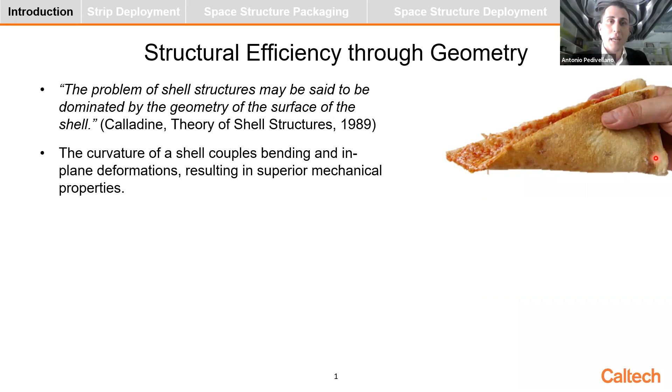Now, most of you have realized at some point that if you hold the pizza this way, by just bending the crust, your pizza slice becomes much stiffer and it remains straight. And this is really the key idea behind shell structures. We're talking about structures that achieve very good mechanical performance thanks to their smart geometry. And by smart geometry, I mean that they really use curvature. Here I'm showing several examples of such structures in engineering.

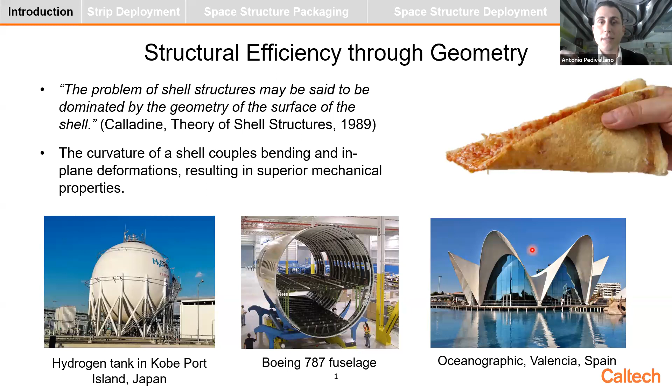On the left, there are spherical pressure tanks. There are also applications in aerospace for airplane fuselages and examples in architecture. So what's common to all of them is that they're using a curved geometry. And because of this, they can be very thin-walled, which makes for lightweight structures. And as you can expect, lightweight structures are essential in space. And in particular, thin shells are used as deployable booms up there.

These booms are essentially like beams, so they are extended in one direction. They have a curved cross-section, and they're very thin. Here we're talking about a few tens of microns. And because they are so thin, the cross-section can be flattened elastically so that you can fold them or you can roll them. And this allows them to be packaged in very small volumes to fit into a rocket and then deployed in space.

And once they're deployed, they recover their original cross-sectional geometry, and therefore they're capable of bearing excellent loads. Because of these characteristics, they're used often to deploy thin membranes. And here on the right, you can see an example of the rollout solar array, where you have this flexible blanket with photovoltaics on it, which is supported by two deployable booms along the edges.

And another example for square architectures is a solar sail that you see here at the top right, where you have a very thin membrane that is supported by 4 diagonal booms. Now, what's common to these two architectures is that in both cases, the membrane has no bending stiffness. And so in order to remain planar, you actually need to apply some tension to it. And this tension is applied by the deployable booms, which are therefore loaded in compression.

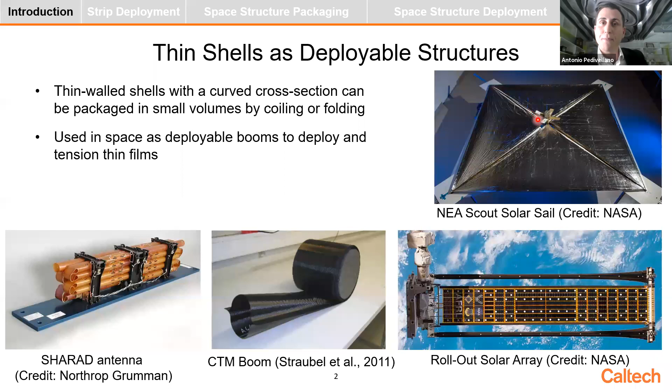Here at Caltech, we've been working on a different architecture, where you are using these thin shell components as bending stiff elements rather than compression elements. But let me just give you some more context about it. This is also part of the Space Solar Power project here at Caltech. The idea is fairly simple. We want to collect solar power in space, and we want to send it to Earth.

Now, this idea has been around for like 50 years, and yet today there is no system like this. The main reason is that the other concepts that have been proposed so far were just too heavy, too complex, and too expensive. And so the way we're approaching this problem here at Caltech is through modularity and lightweight structures. As you can see in this concept here, we envision a system of 3 kilometers by 3 kilometers in space. That's huge. And it's made of a constellation of 60 meter by 60 meter spacecraft like this one.

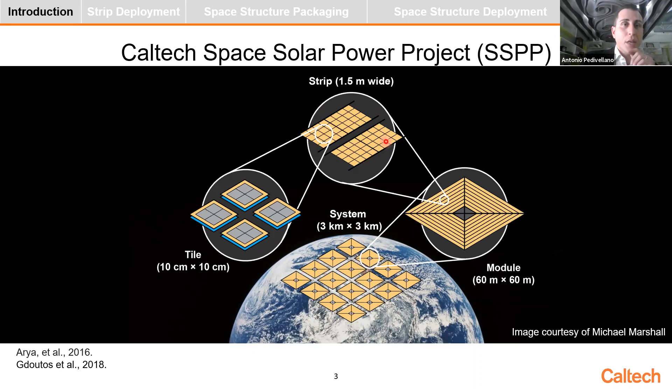The basic structural unit of this spacecraft is the strip, on which we have many tiles, which are our functional elements. And these tiles, which are flexible, combine both solar cells to collect solar power and antennas to radiate this power to Earth. Now, today, I'd like to focus on the structural aspects of this architecture. So let's take a closer look at this spacecraft. As you can see, it's square in geometry. It's made of four triangular quadrants.

And what's unique about this structure is that instead of having 4 diagonal booms running along the diagonals, we have distributed many thin shell components over the entire surface of the structure, and we have connected them in a space frame. And you can think of the space frame as a skeleton, a bending stiff skeleton that supports our flexible membranes. And as you can see here at the bottom, the basic structural unit that I mentioned before is the strip, which is composed of 2 longerons connected by several battens and with this membrane on top.

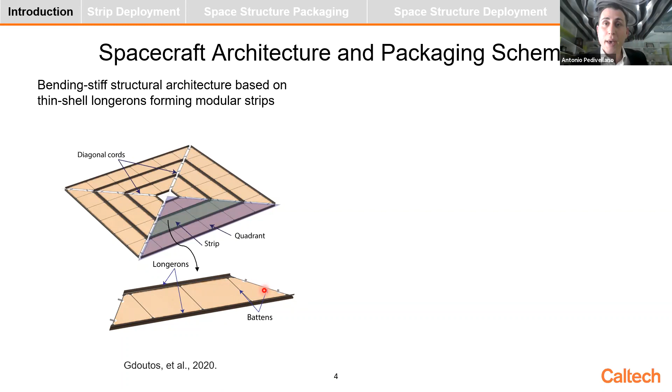Now, of course, you cannot fit a 60-meter spacecraft in a rocket, and so you need to package it. And the packaging scheme was proposed a couple of years ago, and it's inspired by Kirigami. It consists of a 2-step approach. You start from your deployed configuration in here. You first Z-fold each of the 4 quadrants to get into what we call a star shape, and then you wrap each of the 4 arms of the star shape to get into this cylindrical configuration. And to deploy the structure, you follow the same path, but in reverse order.

Now, what's interesting here is that when we are in the star shape and we want to reach the deployed configuration, we can do a strain energy deployment, which means if we just let the structure go, the structure is capable of reaching this configuration by releasing the strain energy. However, this process needs to be understood.

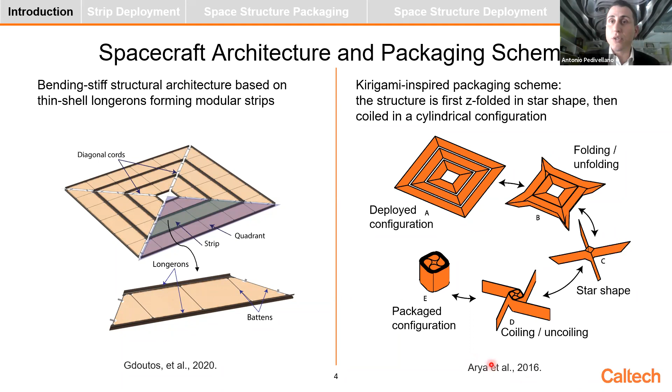And as you can see here, well, this concept was formalized in 2016, but the research on this problem started earlier than that. And ever since, we started a lot of research trying to make this concept real. So really behind what I'm going to show you today, there is the work of many people over many years. And it all started with the packaging concept that you can see here, and it was demonstrated just on membranes. Then we started studying individual components of our system, the longerons first, then the strips, and there were concepts of deployment mechanism to control this packaging process. And it was only in 2019 that we actually built our first 2-meter scale prototype.

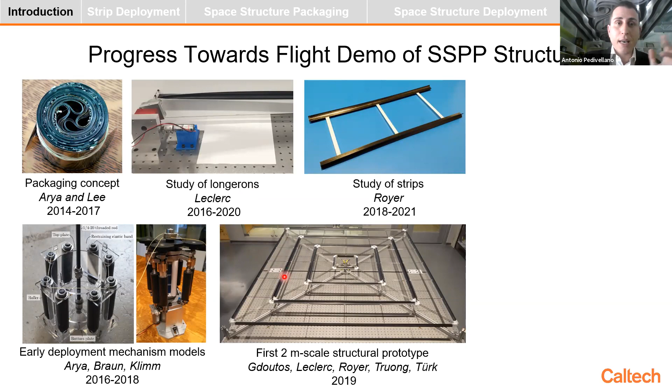And that was about the time when I joined this lab and I started working on this type of problems. And if you fast forward to today, here we are. We are developing our flight demonstration of this deployable structure and its deployment mechanism. And really my research bridges this initial structure that we built and we had no idea of how to package.

And there's actually a flight demonstration that we call DOLCE, which stands for Deployment on Orbit of Ultralight Composite Experiment. And we have been working on this for a couple of years, and it's set to launch next year. So that's pretty exciting. So today you will hear the steps that have taken this structure from here to that. And the way we are doing that is through a combination of experiments and simulations.

From an experimental standpoint, well, ground testing is what is done for most space systems. However, when you have these very large area structures, you run into a lot of trouble. One of the main reasons is that these structures are extremely lightweight and they're designed for space. So they're not designed for being operated in terrestrial application under gravity. And therefore, many of them cannot even withstand their own weight. And so you need some sort of gravity compensation in order to support your structure during deployment.

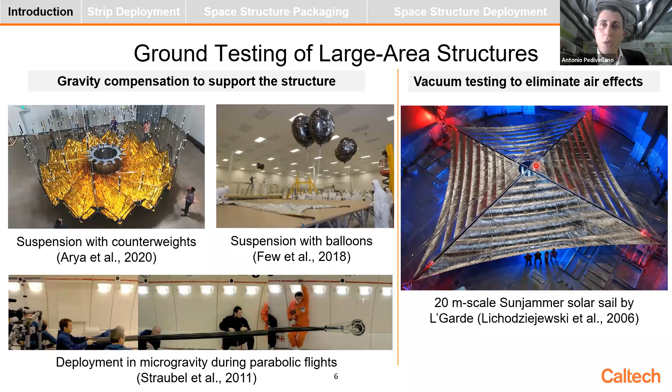And so the bottom line here is that during ground testing, you will never capture the actual behavior that you're going to see in space. And the only way to do that is through numerical simulations. And in the past, people have done simulations of large structures, especially in the context of solar sails. Here, for example, you see a simulation done for the IKAROS solar sail.

And those models were simplified. So initially, they were using the particle method. Then they developed their own finite element code. And these models were very good at capturing the global behavior of the structure, but they were still missing the local effects. For example, the contacts between membranes.

And really, in our case, we are dealing with shell structures. And the behavior of shells is all about local effects. For example, contacts are very important. And when you fold one shell, you start having localized deformations. So if we really want to predict the behavior of our structure in space, we will need high fidelity models of the entire structure, which is something that no one has done before.

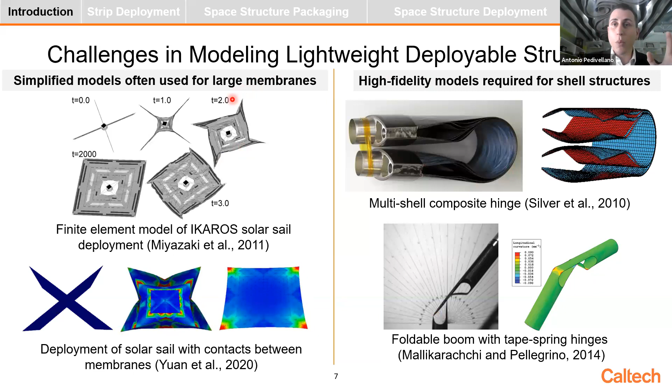And this really brings me to the objective of my research, which is to enable thin shell architectures for large area deployable structures. And just to be more specific, we want to do this in 3 steps. First, we want to observe this behavior experimentally. And in particular, we are asking what happens when you have multiple of these thin shell components folded together and you deploy them simultaneously by releasing their strain energy.

But in order to do these experiments, you need actually to package your structure first. And so we need to design solutions to implement the packaging scheme on these structures. And finally, we want to develop numerical models that are capable of capturing the complex behavior of the structure even during ground testing. And these models can then be used to support the design of new structures, as well as to verify their performance in space before launch.

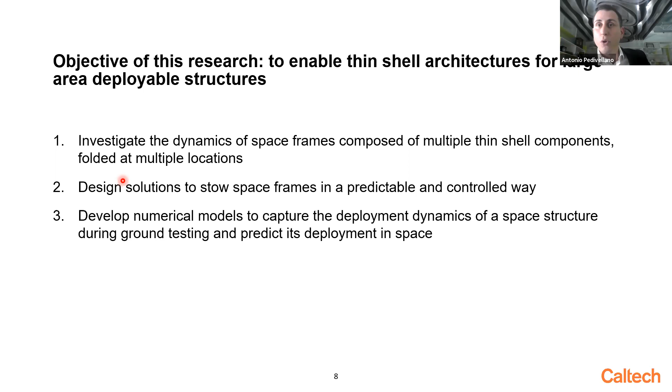The way we are approaching this problem is in 3 steps. First, we're going to look into a thin shell strip, like the one that you see here. So this strip is initially folded, and then we deploy it under strain energy. Then we will move into the space solar power spacecraft, and we will talk about the implementation of the packaging scheme on the spacecraft. And finally, we're going to look into the deployment dynamics of the spacecraft.

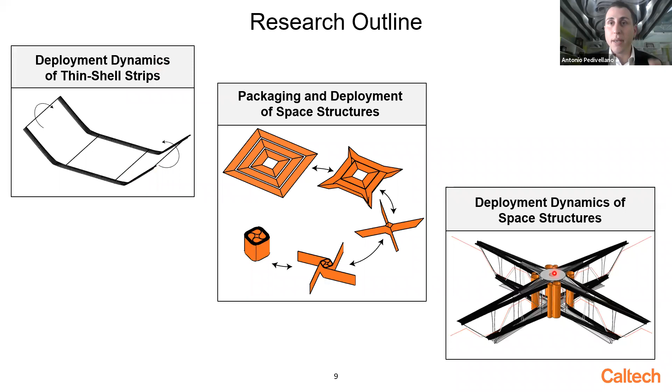But starting from the first topic, here you can see on top right, one of our 1.7 meter scale prototypes that is folded in a star folded configuration. And when we started looking at this problem, we said, well, let's try to model this entire problem at once. Let's build our finite element model. And I started doing that around my candidacy. So it was a couple of years ago. I already had my first model.

But then after a while, we realized that having a model is easy, but having the right model, that's very complicated. One of the problems was that we have many strips stacked together. There are many interfaces, there are many joints, there are many parameters in this problem, and it's very hard to isolate each one of them on this sort of structure.

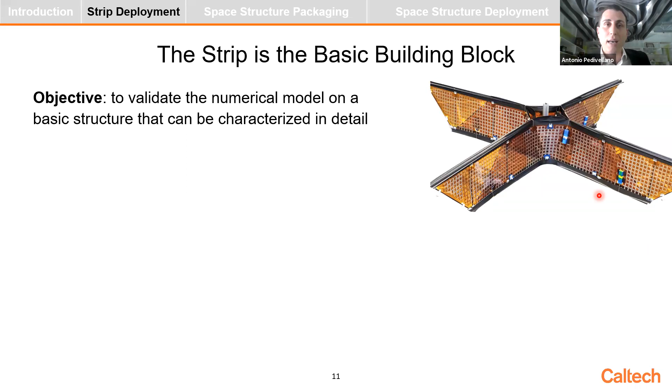And that's why after a while of attempts and lots of efforts, we decided to take a step back and look at a simpler version of the structure. We wanted something that could capture most of the challenges without actually bringing all this complexity. And this is the strip. As we said, our structure is modular, it's made of several strips. And so we just took a single strip from our structure. We simplified the geometry. We made it rectangular rather than trapezoidal. And we placed 2 elastic folds on it to mimic what happens in the real structure.

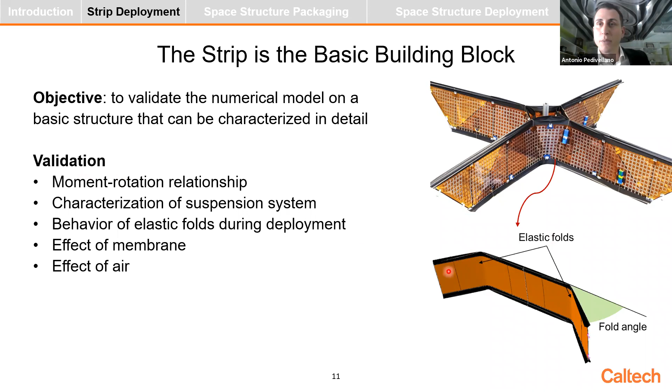And on this strip, we built several versions of it, and we did a lot of experiments to validate all of its behavior, not only the intrinsic behavior of the strip, but also the effect of the membrane on it, the effect of air, and the effect of the suspension system. And we built our finite element model onto the strip. So let me just give you some more details about this deployment study.

So here you can see at the top our strip. It's about 1 meter long, and it's made of two longerons that you see here. They have a TRAC cross-section, which is made of two circular arc flanges connected on a flat web. The longerons are connected by several transverse battens, and there is a membrane on top.

So this is just a dummy membrane. It's just to take into account the effect of a real functional layer. But this membrane has no functionality yet. So we built two models of this strip, one with the membrane on top and the other one without, just to understand what the effect would have been.

And we built a suspension system for this experiment, where we have cords running over pulleys and connected to counterweights. Now, in this case, we are deploying our structure against gravity. So this is not a gravity compensation system. Really, in this case, we are accepting the effect of gravity, and we built a suspension system that is easy to characterize in a very deterministic way.

And the initial conditions for this problem are set by two parameters, essentially. One is the distance between these two elastic folds, and the second one is the angle of the elastic folds. In particular, this angle is controlled by two other parameters, this initial height h0 and the mass of the counterweights m. So we started doing over 100 experiments, testing all different combinations of these three parameters to understand what their effect was on the deployment of the structure.

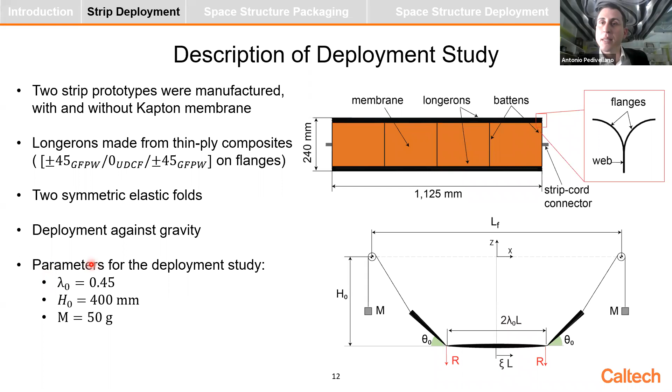And well, we found that in most cases, the behavior of the structure was consistent. So qualitatively it was the same. And so what we picked for the study was a set of parameters that is representative of a wide range of conditions.

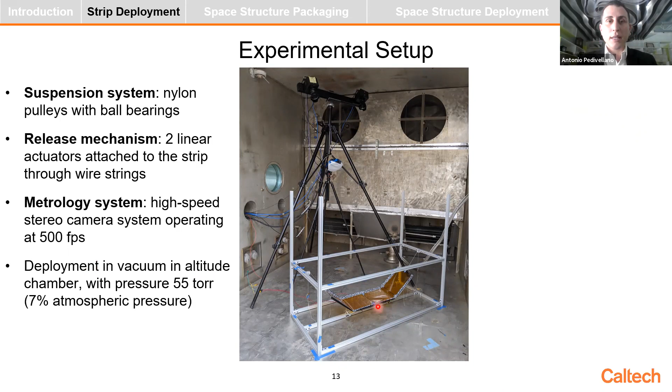So we built our experiment, and you can see it in here. We have the structure with the membrane in here, inside an aluminum frame that contains it. And on the aluminum frame, we have pulleys, miniature pulleys to have very low friction and inertia. We have a release mechanism that is composed of two linear actuators. So this release mechanism essentially holds the structure in its folded configuration, and then we actuate it, and it releases the structure in a very synchronized way.

And then we have a metrology system with two high-speed cameras that you see here. And with these cameras, we take 500 images per second, and we use them to actually get quantitative measurements out of these experiments. And as I mentioned before, we were interested in understanding what the effect of air was. And so we did our experiments in an altitude chamber, of which you can see the inside in this picture.

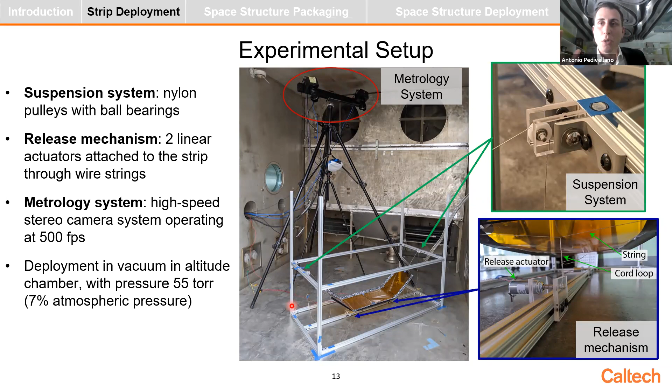And we operated this chamber at about 7% of atmospheric pressure. So this is not properly vacuum, of course, but for the purpose of our experiment, we found that at this pressure, the effect of air became negligible for our structure. So that's what I'm going to call vacuum from now on. And once we have the pictures from our experiment, we implemented an algorithm to reconstruct the shape of our structure from there. And the way the algorithm works is that we start from our images.

And as you can see in here, there are many white dots on our longerons. That's a speckle pattern that we painted on it. And we use digital image correlation to convert the speckle pattern into a point cloud. So we know the coordinates, the 3D coordinates, of many points on the structure.

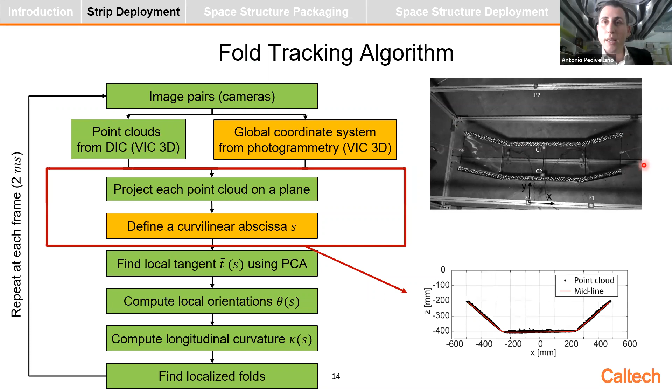And then we take each longeron, we project its point cloud on a plane. We find the midline for this point cloud. And we compute the local tangent to each one of the points, and then its orientation from the x-axis. So we get the plot that we have here.

So now here it's interesting to notice that we have basically three areas of uniform orientation. So at the center, the strip remains horizontal. And then at the two ends, we have equal and opposite angles. And essentially, the strip behaves like three panels connected together by hinges that gradually open.

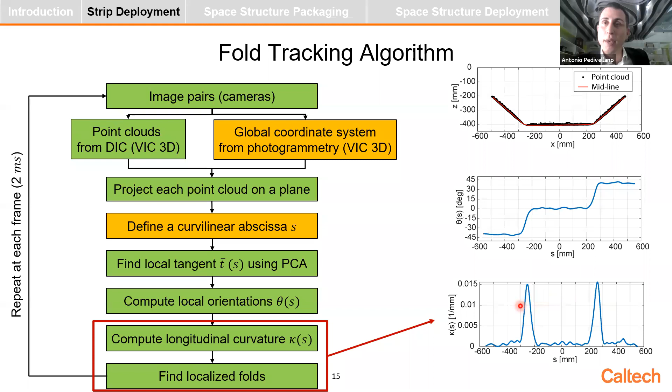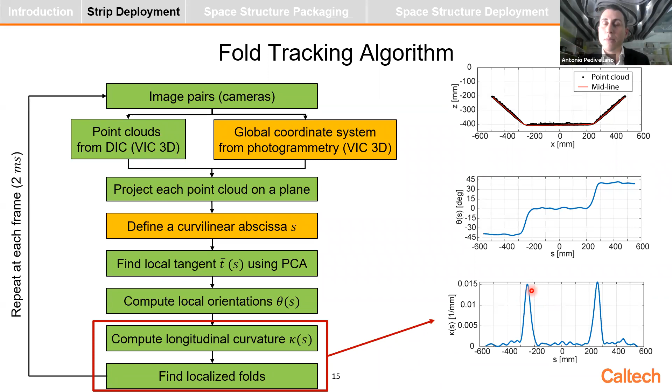Now, if you take the numerical derivative of this plot, you get the distribution of longitudinal curvature on the longeron. And again, here you can see that there are two peaks, very sharp. They correspond to the location of the elastic folds. And this suggests that for this problem, essentially the structure behaves as a collection of rigid parts connected by elastic hinges. And we're going to use this observation later in this talk.

So these plots are for a single snapshot from our experiment. Now we can repeat it for the entire duration of the deployment. And what we can get, for example, is the angle of the elastic folds that you see in this plot here. So there are two lines corresponding to the two longerons. So let's just look at one of them.

And what you can see there is that we are plotting the angle, the orientation of the two ends of the structure. And that's why you get two lines for each longeron. And you can see that it's pretty symmetric during the deployment. So this angle starts from about 45 degrees for this case, and it decreases to 0.

And when all the four folds on the strip became 0 for the first time, we defined our time of deployment, which for this case is slightly more than 300 milliseconds. Also, after this point, you can see that the angle remains 0. So basically what happens is that the elastic folds latch, the longeron becomes straight, and it doesn't buckle again.

Now, if you look at the elastic folds here at the bottom, and we track the location of these peaks over time, you see that the elastic folds remain stationary during this problem. And this is not an obvious result, because we know that there are many other problems in which instead you have significant propagation of the elastic folds. So it's interesting to see that in this case, this doesn't happen.

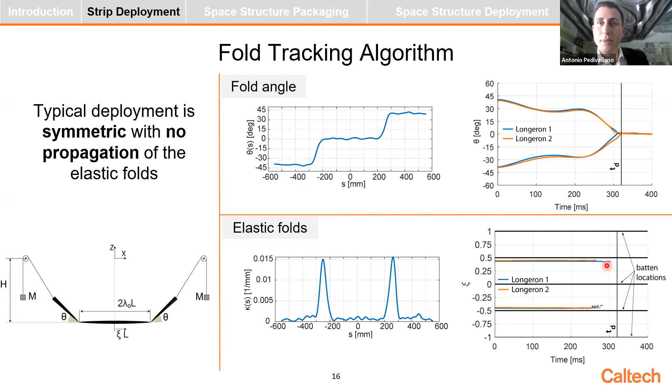And now that we have our algorithm in place, we can finally look at the experimental results. So first, I'm going to show you the results for the strip without membrane. And I'm plotting here the angle of the elastic folds. So here in blue, we have the deployment experiments in air, and in orange, we have the ones in vacuum. And you can see that in this case, there is basically no effect from air. The behavior is pretty much the same.

However, if you look at the strip with membrane, now you have a significant difference. And in particular, the deployment in air takes about 70% longer than in vacuum. And this means that for that type of structures, you cannot neglect the effect of air.

And another thing that I'd like to notice is that if you compare now the orange lines between the two plots, that's the behavior in vacuum, they're qualitatively the same. So this means that essentially the effect of the membrane is simply to add more inertia to the structure, but they don't contribute to changing the response of the strip.

And this makes sense intuitively, because our strip is basically loaded in bending. And we know that membranes have almost no bending stiffness. They only react to in-plane shear. And therefore, for this specific case, they have no effect on the deployment.

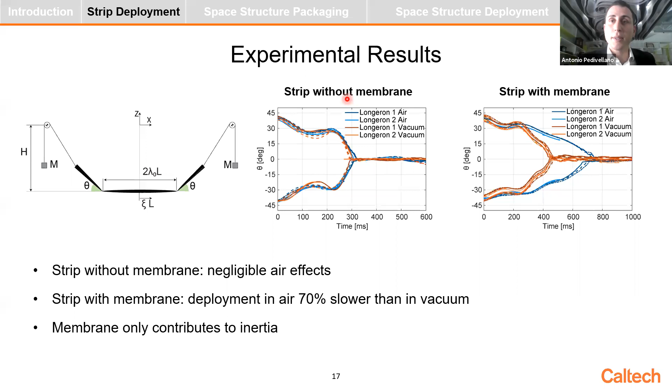Well, now let's see if we can capture all of these effects in simulations. And this is the finite element model that we developed in Abaqus. We are using an explicit dynamics solver. And since we saw from experiments that the behavior of the structure is mostly symmetric, we are only modeling half the strip. So here you can see the symmetry plane. A few words about this model. We are modeling the longerons as shell elements, the battens as beam elements.

We have 1D connector elements for the suspension system. And for the membrane, we're using membrane elements with a special material formulation that also accounts for wrinkling. And that's called the IPM model. It's been proposed many years ago, but we're using an implementation that was published by Deng and Pellegrino in a

paper from 2012. And for this type of simulation, the computational time is in the order of a day for the structure without membrane, and about 3.5 days for the structure with membrane. So they're quite intensive.

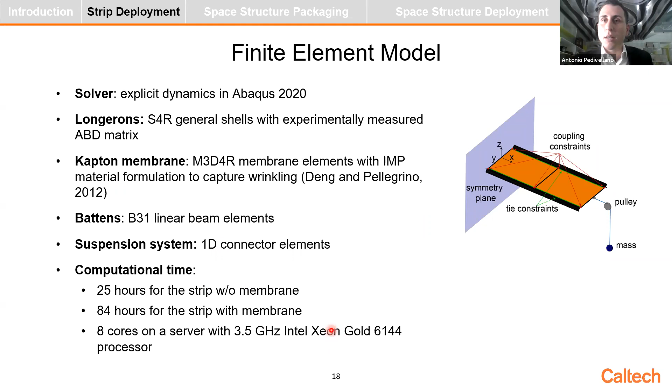Another thing that I'd like to mention is the effect of air. As we said, air is important for these problems. And if you really want to resolve this interaction, you need coupled structural and CFD solvers. That's what some people do. However, those are very computationally expensive, and we really wanted some simple way of dealing with this problem.

And so we are taking inspiration from some research that has been done on the vibration of membranes in air. Those studies identified two main contributions from this interaction. One is an increased inertia to the structure, because as you move your structure through a fluid, you are moving some masses of air with it. And so that results in added mass. And the second effect is air damping, because you are basically losing some energy in this interaction with the flow.

worked fairly well. And here, the idea behind choosing this half cylindrical volume is that we expect the effects of air to be basically zero at the edges and to increase as you move away from the edges. And that's why we ended up with this cylinder.

Regarding the air damping, if you look at our problem from an aerodynamic standpoint, it's very similar to the problem of a flat lamina with an incident flow perpendicular to the lamina. And in that case, in aerodynamics, people use a drag formulation where the drag increases with the square of the relative velocity. And the proportionality factor is a drag coefficient, for which there are many examples in literature for many

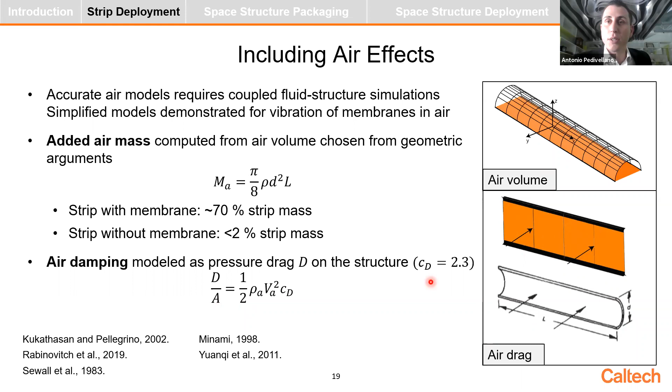And now let me just spend a few words on the way we approach this problem. And this is a pretty general way of dealing with this type of deployment problems. You always start from your initial undeformed configuration. First, you fold your structure.

And here you can see that the main contribution to the strain energy really comes from just flattening the cross section in the very first step when we create the folds. Then we have an increase of the strain energy as we fold our structure because we are increasing the angle of the elastic folds. And after an equilibrium step in which we achieve equilibrium, we start deploying our structure.

You see that the strain energy decreases as the structure becomes flatter and flatter. And at some point, there is a sharp decrease. And this is when we have snapping of the elastic folds. So here, basically, the elastic folds disappear, and the remaining strain energy is associated with the elastic vibrations of the structure. And we dissipate these vibrations in the final equilibrium step.

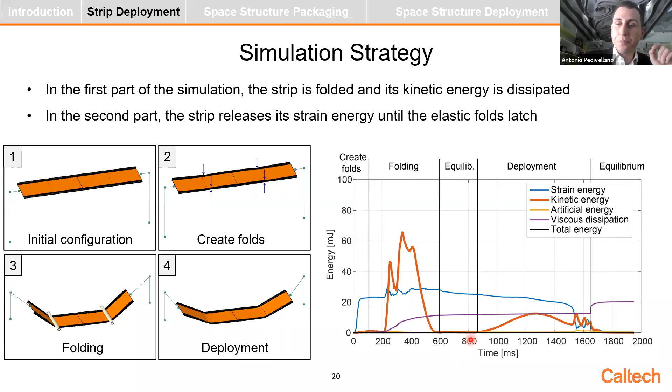And now let's look at the comparison with the experiments. Here we are showing different cases, so just don't focus on any one of them in particular. But what I like to show you is that we tried different combinations, the structure with and without membrane, in vacuum and in air. And we also tried different masses in the suspension system.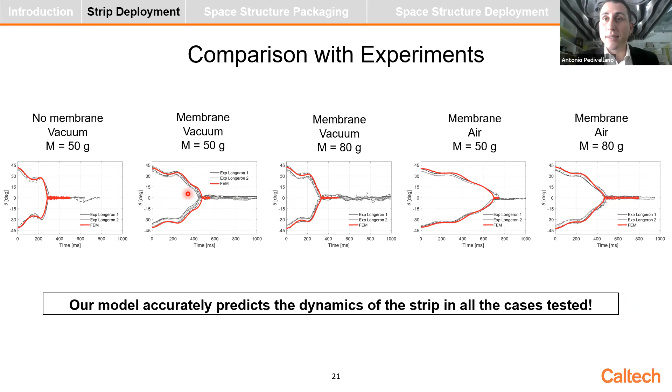And for all of those cases, we found an excellent agreement between the experiments in gray and the simulations in red. So that makes us confident that actually this model works and is predictive of the behavior of this type of structures. Well, now that we have this, we can try to move towards our solar power spacecraft. But if you want to do experiments on this, you first need to package it. So that's the problem that we're going to discuss now.

And here we have the first fundamental question to ask. Well, how can we stow our structure in a robust and repeatable way without breaking anything? And this is not a trivial question, because the first time that we built one of our deployable structures at the 2-meter scale, and we tried to actually fold it to do this process, starting from the deployed configuration into the star shape, well, we found this process incredibly hard.

As we were trying to fold our longerons, there were buckles appearing at random locations. So it was a pretty messy process, and we ended up actually breaking some of the components on it. So that told us that actually we needed a systematic way of folding our structure, and that's one of the things that I'm going to discuss today.

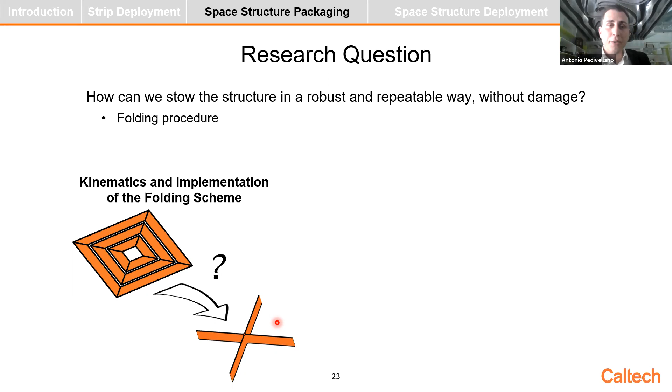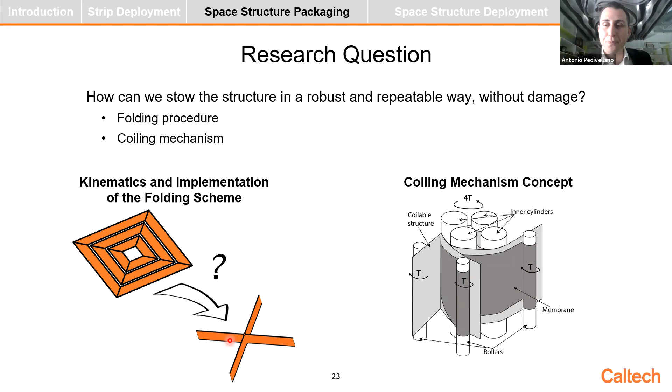The second thing is that, well, now that we have this star shape, how do you actually get into the rolled configuration? And for this, we will need the coiling mechanism, and we're going to discuss that as well. So let's just start with the first step of this packaging process. So we have our deployed structure, and we want to get into the star shape. The approach that we use in this case is to look at the kinematics of this problem.

So here on the left, you can see the model of our deployable structure. We have 12 strips in total, and they are arranged in 3 concentric squares. Now, if you just isolate one of these squares, we get something like this. So now we have 4 strips interconnected together, and we're assuming that they are hinged to each other.

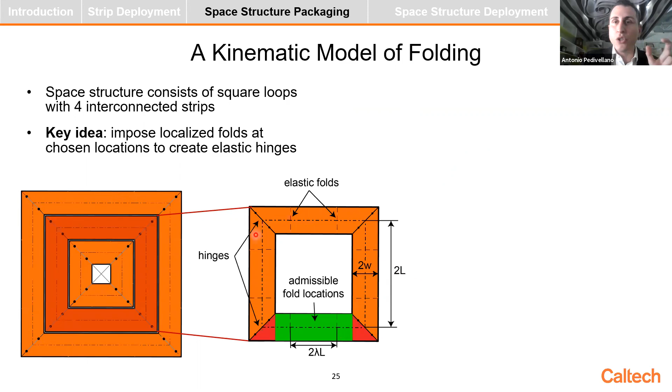Now, the key idea here is the following. We know that as we fold the shell structure, you're going to have elastic folds. So let's just put them at places that we want. And that's what we did. We placed 2 elastic folds on each one of the strips. We made them symmetric just to reduce the number of variables in our problem.

And now, as you try to fold our structure, if you remember now from the strip problem, you saw that essentially all the deformation was taken by these elastic folds, and everything else was mostly planar. It had almost 0 curvature. And so as a first order approximation, you can take this structure and convert it into an equivalent mechanism, where you basically replace each of the elastic folds and each of the hinges with a joint, and everything else in between is made of rigid links.

Now, if you look just at one of these joints, we have 2 degrees of freedom there. One is the angle, the rotation about the fold axis, which is this angle beta. And the second one is a torsional angle, xi, which takes into account that we have actually a flexible structure and torsion is possible. And so for this system, we end up with 24 degrees of freedom.

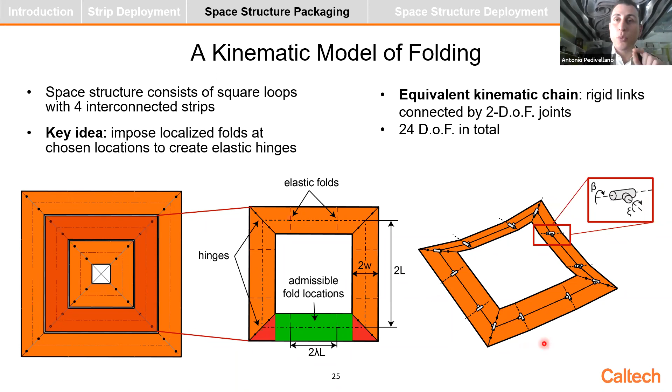Now, the way we are going to solve this is an approach that is very well known in the robotics community. And essentially, whenever you have this sort of closed chain, you have to impose some loop closure equation to make sure that your chain remains connected as it deforms. And the formulation that we are using here is shown in this green box. And essentially, what you have here is these transformation matrices T, which combine both rotations and translations.

And what this equation tells you is that if you start combining coordinate transformations between following links until you get back to the original point, you should retrieve your identity matrix because you're back at the starting point. Now, this is a matrix equation, so we have 16 scalar equations. However, only 6 of them are linearly independent. And that's because you can always express a coordinate transformation as 3 rotation components and 3 translations. So that's why we only have 6 equations.

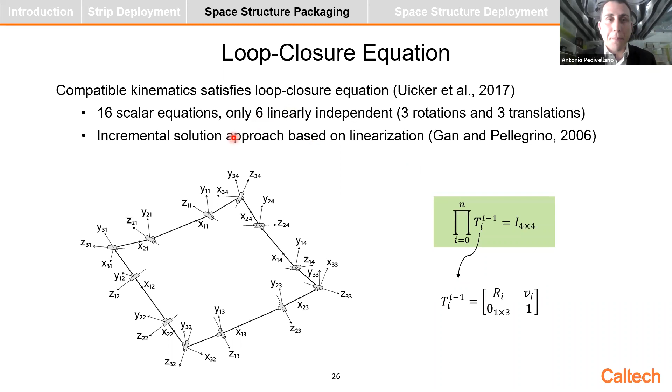This is a highly nonlinear equation. And so to solve it, we used an incremental solution approach that was developed by Gan and Pellegrino. And now let's just go to the results for our single square loop. Another thing that I'd like to do here is to simplify the problem a bit. So we started with 24 degrees of freedom, as you remember.

And if we impose 4-fold symmetry, now we are left with only 3 degrees of freedom, which are the fold angle that you see here, the hinge angle here in green, and the torsion of the strip, the twisting, which is not shown in this diagram. And the solution that we get is shown in this plot. And it's fairly simple. As you increase the hinge angle here, you are decreasing the fold angle from 0 to minus 45 degrees. Now, there are a few interesting things about this solution.

The first of them is that there is no twisting. This red line is 0. And that's not by construction. It was actually free to twist. That's just a solution that we found. And that's nice because it means that we don't need to apply any torsion to our strips. Our functional elements don't like it.

The second thing is that our solution here, this relation between the internal variables of this chain, is independent of where we place our elastic folds. In this case, we place them here at the ends, but we could place them anywhere else and it would be the same solution. And the third aspect is that this solution is actually unique, which means that if you try to fold your structure in a 4-fold symmetric way, there is only one way to fold it. And this is important because it allows for a very deterministic folding process.

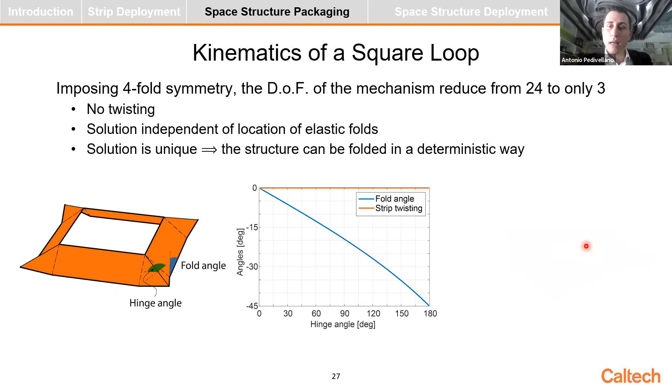And just to show you an animation of what this process looks like, it's essentially a combination of folding of the strips and a rotation out of plane. So this is the type of motion that we have for this type of structure. But now that we have the solution for the single square, let's go back to the original problem, which was how to fold the full structure. Just to give you some intuition about this problem, for each one of the squares, the solution is still the same as I just showed you.

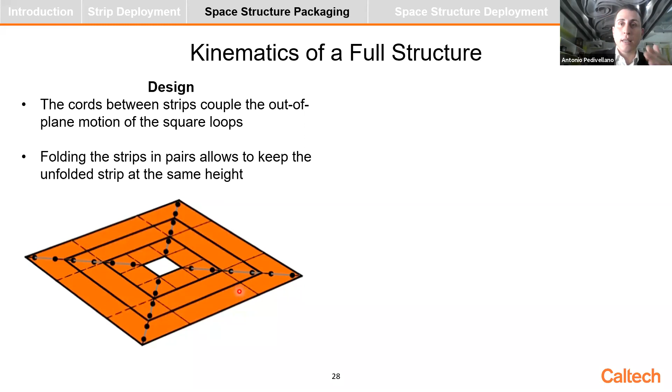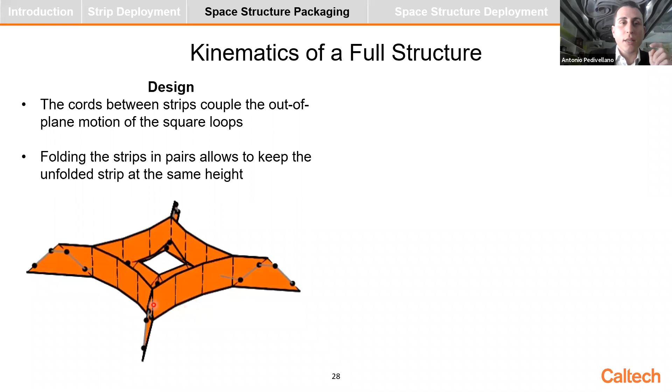However, now we have additional constraints because the strips are connected to each other by cords running along the diagonals. And also we have more degrees of freedom because now we can also control the rigid body motion between squares, and we can decide the sequence in which we want to fold our squares. So let me just show you the result that we came up with. This is a 2-step process. First, we fold the outermost strip and the middle one, and then the inner one, as you see here. And now we have our design.

So how do we implement this design on the real prototype? There are 2 things that we took from this design. First of all, the location of the elastic folds, which are the solid lines that you see here. And the second thing is the sequence, the 2-step approach that you just saw. And now I'm going to show you a time lapse of us folding the structure. The way we impose elastic folds here is by putting hairpins on our longerons. So here you're going to see the first step of the folding process, in which we fold the outermost and the middle squares. And this is it.

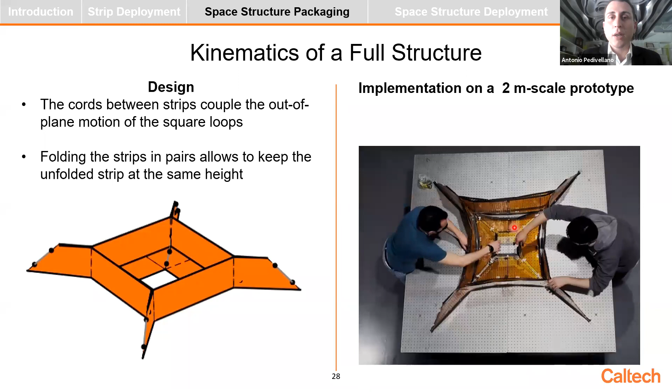And again, we add more hairpins to constrain the structure and to stay into this configuration. And now in the second step, what you're going to see is that we're going to fold the square, and one of the strips will disconnect a bit from the others.

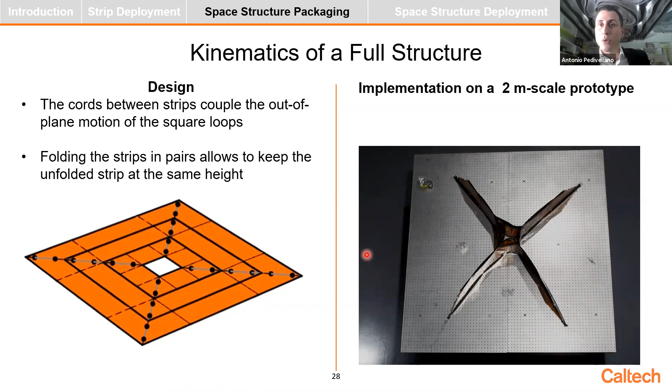Now, this is just to remind that the actual structure has a bit more degrees of freedom than what we had in our design. In particular, the strips are not really hinged together. They're hinged to a cord. And now you can actually slide this cord between strips, and so you can disconnect the strips without breaking them. So this means that there are some aspects that the kinematic model doesn't capture. However, by using the right handling of the structure, you can actually match that design fairly well.

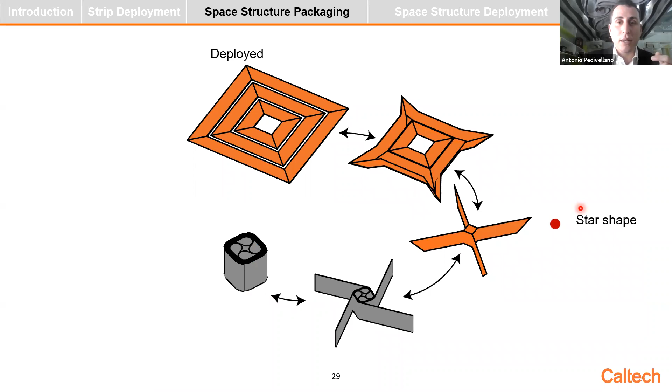Now that we have the star shape, we want to do the final part of the packaging process, the coiling. And in this case, the main challenge is that thin shells don't like to be coiled. And when you try to coil them, they actually undergo lots of instabilities. I'm showing you some of them here. The reason is that essentially, as you coil them, they store strain energy because they're bending stiff. And so they try to find a minimum energy configuration that, believe me, is never the one that you want.

And so you start having buckles, which is shown here, where you form this periodic pattern of high curvature regions connected by portions of zero curvature. And that's bad because your nominal radius of curvature should be the radius of the hub, 2 inches in that case. And actually you have higher curvature, which means that if you have some brittle components in your structure, you may actually damage them.

The second type of instability is blossoming, when you have your thin shell coiled around the cylindrical hub. You try to deploy this shell by rotating the hub, but actually the shell doesn't deploy, it just expands inside the deployer. And this is particularly true when you have some compression force applied at the tip of the shell, which is, for example, what happens if you are trying to deploy a membrane. And in this case, the risk is that you jam the mechanism first, and then you can have a very high curvature at the root. And so again, you break your structure.

And so people have come up with different solutions for deployable booms. Here I'm showing different kinds of stabilization that have been used in the past. One of them is the radial force stabilization, in which you basically apply radial forces at discrete locations around your structure to push it against the hub. This is by far the most common approach because it's the simplest to implement. You can, for example, use some spring-loaded rollers. However, here you start having a lot of non-uniform forces, which is not good for brittle components, and you don't really suppress buckling.

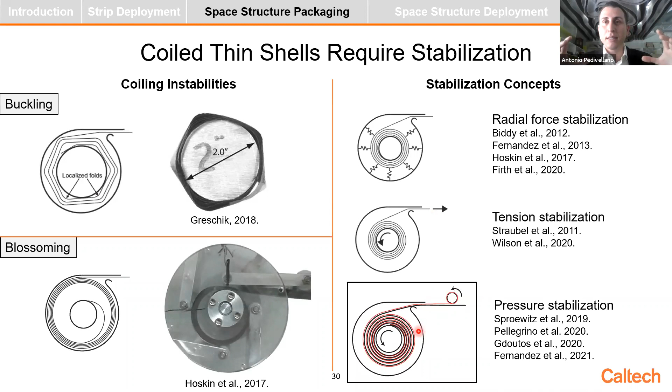And so the concept that I'll be focusing on today is the pressure stabilization that you see here. In this case, you have your structure in black, and that's co-coiled with a secondary membrane or thin strip of metal that is shown here in red. This thin membrane is connected at one end to the central hub, and at the other end to a secondary cylinder that you see up here. And so by applying some torque to this cylinder, you're going to have some tension in the membrane, and therefore you are basically compressing the structure to conform to the hub. And so this is the concept that we used.

And here you can see our idea of this deployment mechanism for our structure. The way it works is that we have 4 inner cylinders that you see in here. They rotate together, and by rotating, they control the coiling and uncoiling process. Then you have the coilable structure here in light gray, and the membrane in dark gray. And we have 4 rollers that are stationary and placed outside of the mechanism. These rollers have some torque applied to them. It can be either passive using some springs, or active using motors.

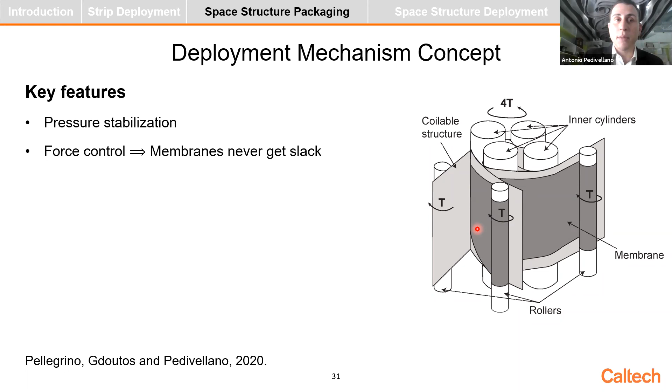And so the structure in turn is pushed against the inner cylinder, and that gives us the right stabilization that we want. And another feature of this mechanism is that we are using force control, which means that we are independently applying the same torque to all of the 4 rollers.

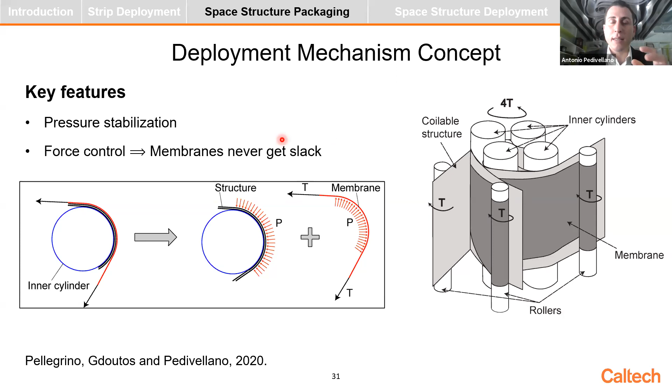And this is extremely important because now we don't have 4 independent pieces of the structure. They're all connected together. So if the structure is not perfectly symmetric, or one of the membranes is longer than the others, and you use displacement control, you end up with some of the membranes getting slack. In our case, instead, using force control, we make sure that our mechanism is robust against any type of misalignment. And so the membranes never get slack, and this is much more reliable than other concepts.

And this is the implementation. So this was the first prototype that we built. It's a proof of concept, and it has the deployable structure inside. So you can think of this 1.7 meter structure that gets coiled in a diameter of about 20 centimeters. So that's pretty nice.

Just to mention a few features of this mechanism, we have a motor at the center that rotates the inner cylinders. We have active rollers in this case, so each one of the rollers has a motor inside. And we have a release mechanism at the top, which has a single actuator that you see here. So the release mechanism has 4 latches here in orange. And what happens is that when you actuate it, these latches open and the roller assemblies rotate about a hinge that is at the bottom. And so this basically opens the mechanism.

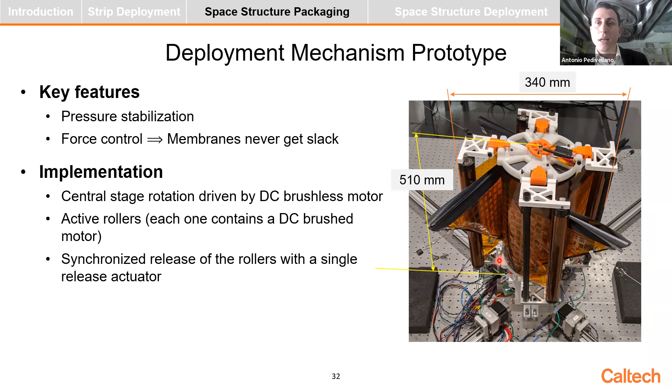And this is essential to actually move to the next step of deployment. So after you uncoil your structure, you need to unfold it for it to be planar. And so you need to open the mechanism. And so this is the way we do that.

So let me show you a video of this coiling process. Here we have the structure initially in the star shape, and we gradually coil it. And this deployment was done at the end of 2019. So we spent approximately a year trying to make it work. And well, it worked. And after that, we've been doing this type of experiments on many structures and with a different version of the mechanism as well. And it worked in a very reliable way.

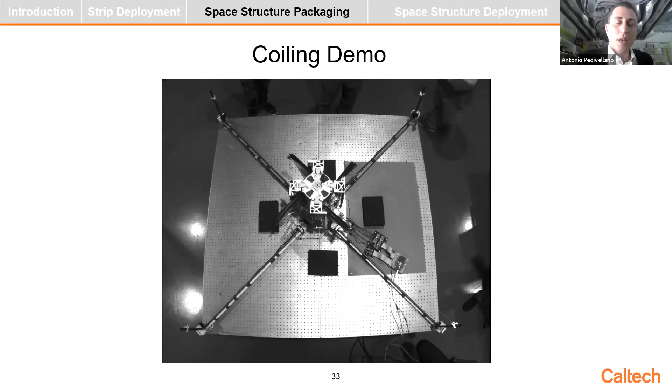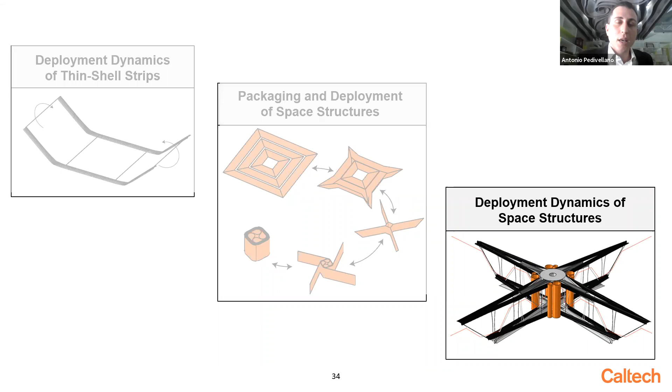I think we have some internet problem. Hello? We're hearing you fine, Antonio. Oh, okay. No, it's just that your image is frozen on the screen. Just try the next slide and see what happens. Okay, sure. Sorry. We may be okay, or maybe not. So let's just see what happens. Okay, for now it's fine.

Okay, well, now we have our structure coiled. We can take care both of the coiling and uncoiling process, and so we can get into the star shape. And now at this point, we want to study the deployment of the structure from this configuration.

Try turning off your video. I did. It says that Zoom is not responding. Okay. Okay, try the next slide. Fine. We're seeing slide 34 right now. Me too. Yeah. Okay.

So let me show you a bit this problem of deploying the structure. So we have the structure in the star shape you see here. We have the deployment mechanism in a very idealized form. And we have 4 cord tensioning systems along the 4 diagonals of the structure. So these are responsible for actually supporting the structure at deployment during ground testing. Now, if you look at this problem from a kinematic standpoint, we can use the same model that we showed before, and we get something like this.

Of course, the kinematic model doesn't know anything about energy. So now there are many questions that remain open. For example, how long does the deployment take? Does the structure actually have enough energy to fully deploy? Does it get tangled? Does it interfere with the mechanism? And so to answer all of these questions, we approach this problem both through experiments and simulations in finite elements.

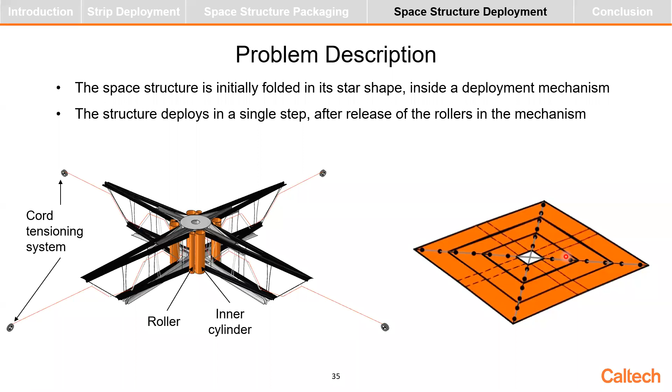So let's start from the experiments. Now, we did our experiments in the CAST aerodrome. What's nice about it is that they have an amazing motion capture system distributed over the perimeter of this test area. And these cameras can track the locations of retroreflective markers distributed on the structure, and they return in real time their 3D coordinates. So this is very nice because it basically allows you to track a large number of points in your structure with very little post-processing.

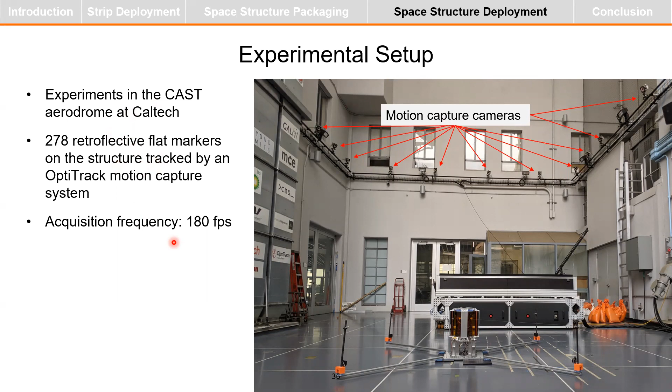And because of this, we distributed almost 280 markers on the structure, and we captured the images at 180 frames per second. Now, if you look at the test article, this is what it looks like. We have our deployable structure in the star shape. You can see that this structure is different from the one that we used for the folding part. So this is a new version of the structure and doesn't have membranes on top. So this makes the deployment a bit simpler to predict and also a bit more deterministic.

And also the deployment mechanism looks different. So this is the next version of the mechanism based on the same approach, on the same concept, but this is actually the one that is designed to survive the launch environment. So this is the one that is undergoing the qualification test to be ready for the flight demo.

And of course, as you can expect, all of this work couldn't be done without lots of support. So actually, the Dolce team developed the structure and the mechanism. So behind this experiment, there are many months of work by many people. It was a team effort. Well, one of the main differences between this mechanism and the previous one is that we have individual release mechanisms on each one of the 4 rollers. And here you can see one of these actuators.

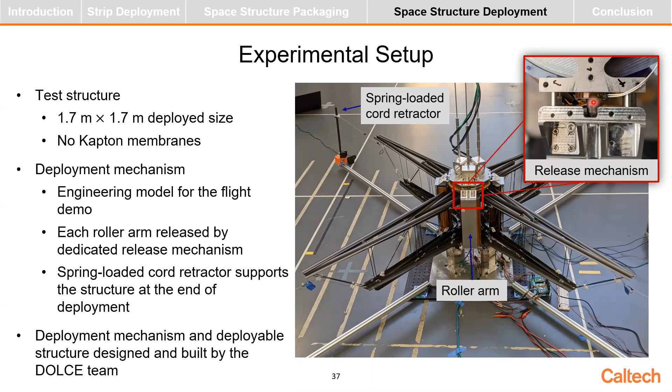So let me just show you a video of what this deployment looks like. Here we have our structure initially rolled inside the mechanism, and we are gradually expanding it. And I think in these 40 seconds of video, you're going to see my entire research coming together in a single place. Because to get the structure folded and packaged, you actually need to use what I showed you before. And to deploy it, now you're going to see all the work that has been done.

So now we have uncoiled the structure and we are in a star shape. What you're going to see next is the rollers releasing and the structure expanding out. So this is pretty fast. It's less than a second, so be ready for it. And this is the unfolding process. And now let me show you a slow motion video of the same experiment. So you see the mechanism opening and the structure gradually expanding out.

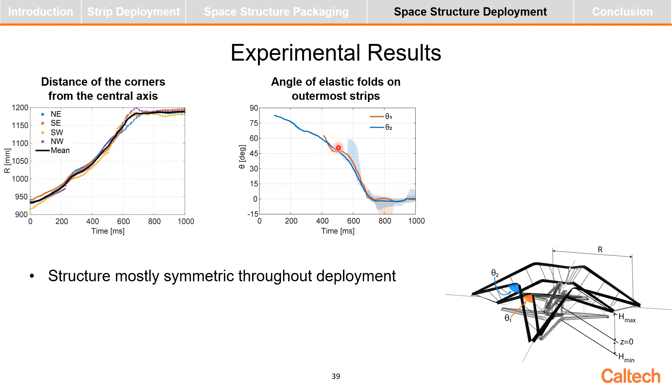And finally, we looked at the envelope of the center strip heights. So this is basically the locus of the highest and lowest points of the structure as a function of the distance from the center. And this has significance for 2 reasons. From a theoretical standpoint, it tells us that this deployment really doesn't happen in a plane. It's a highly 3-dimensional motion, which spans a height of about 550 millimeters.

From a practical standpoint, this also tells us what's the keep-out region for our deployment mechanism, in order to deploy the structure without interfering with anything else. So in a real system, if you place some other component into this area, you're probably going to interfere and prevent the deployment of the structure. So this is very important from a practical standpoint.

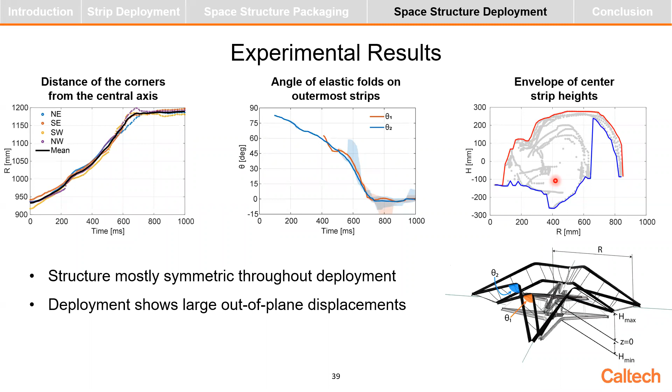And now that we have our experiment in place, let's look at the simulation. So what we try to do here is to bring as much as possible from the strip deployment study. And so many of the parts of the structure were modeled in the same way. However, of course, there are many new challenges to solve. So let me just give you some details about it.

So first of all, we assumed 4-fold symmetry on the structure. So we are only modeling 1 quadrant as representative of the entire thing. We are not adding any air effects because as we found in the first part of this talk, we don't have membranes, and in that case, the effect of air is negligible. And for this type of simulations, the computational time is in the order of 4 days. So it takes a while.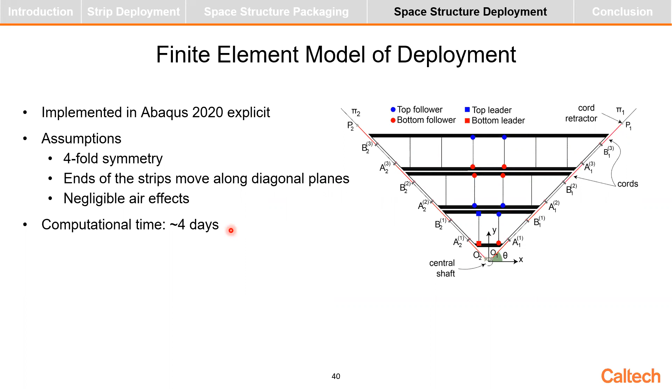And the most challenging part of this simulation is folding, because once you get your structure folded in the right configuration, then it becomes easy to let it deploy. And for the folding part, one of the challenges was that we cannot simply use the same process that I showed you for packaging the real structure, because it's a 2-step approach and it will take too long. So we had to find a more efficient way to fold the structure.

And the way we are doing so is by Z-folding all of the strips at the same time and having a fold at the center. So this process is controlled by controlling the difference in height between the control points that are placed on the mountain and valley folds of the structure. And so, of course, this folding process now is not compatible anymore with the cords running between strips. And so we deactivate them for this part of the simulation.

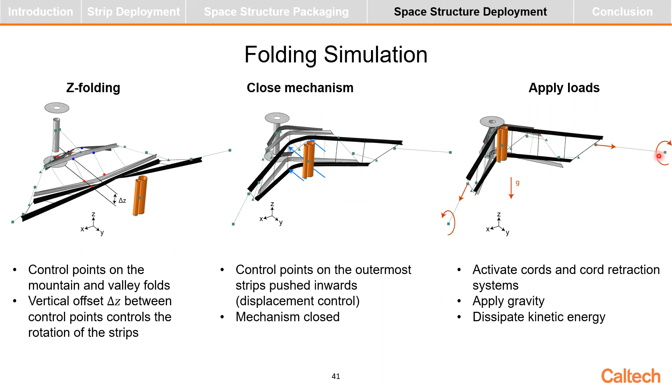So once we get our strips rotated into this configuration, we simply push the structure towards the center of the mechanism, and we close the mechanism around it. And we get into this configuration, and we finally apply all the loads that we need. In particular, we apply gravity. We activate the cords between strips, and we apply tension to the cord retractor system. And with this, we have the structure ready for deployment.

So let me just show you a comparison between the experiments on the right and the simulation on the left. And this is what happens. So the rollers gradually open, and you see that the squares are deployed out of the structure almost one at a time. Now, of course, it's difficult to compare them, I know. But one of the differences that I'd like to highlight here is that, let me show this video again. Sorry, yeah.

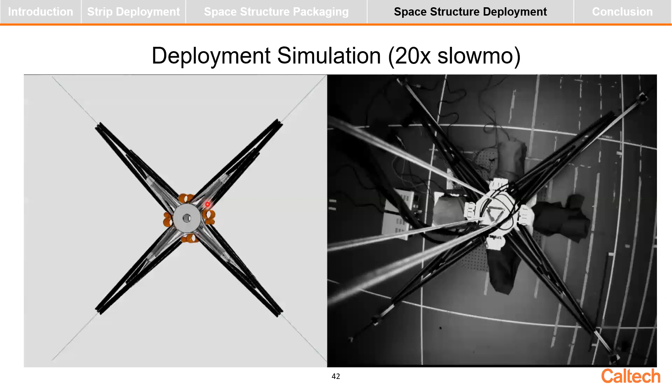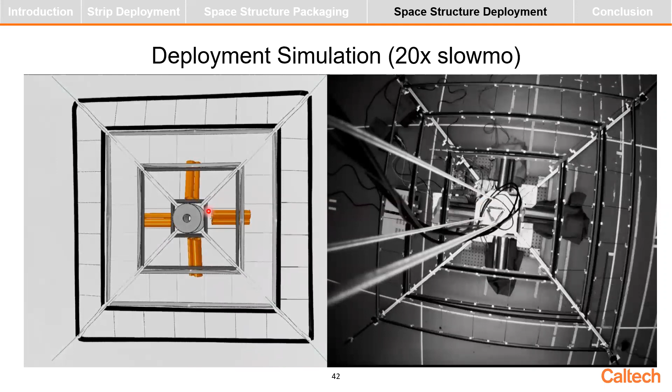In the experiment, the rollers don't really release at the same time. There is a little bit of delay between them. Whereas in our case, we are using a fully symmetric model, and therefore they ideally release at the same time. And this is an important difference that affects a bit the results that you're going to see next.

So let's compare the simulations with the experiments, and we will use the same metrics as before, just to be consistent. So here on the left, you see the evolution of the distance of the corners of the structure from the center, as before, this distance r, where in solid lines we have the experiment, and in dashed lines you have the simulation. And you see that there is globally pretty good agreement between the two of them.

We capture the right deployment time. There is a little bit of difference at the beginning, because as I said before, at the beginning, the simulation deploys faster because the mechanism opens in a synchronized way. Now, if we look at the angle of the elastic folds, the second plot here, you can see that there is very good agreement between the two of them. And this tells us that essentially we are capturing very well the elastic response of the strips.

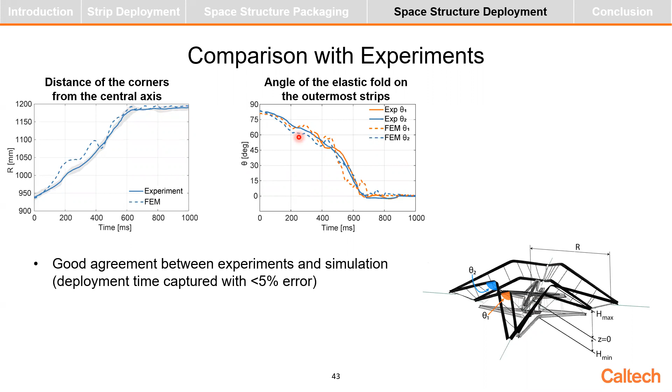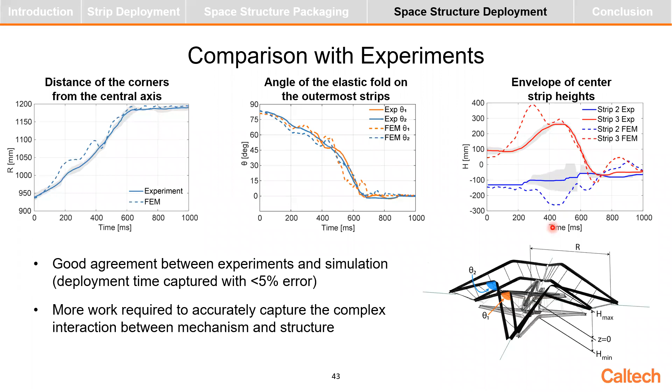And so really the only difference between experiments and simulation is in the rigid body motion of the structure. And you can see this, for example, in the envelope of the center strip heights. So again, here we are tracking in red the highest points of the structure at the center and the lowest in blue. And you can see that simulations overpredict this deployment envelope in both directions, just by virtue of this faster release of the rollers. So there is some extra work to be done there for sure.

And with this, I'd like to wrap it up. Let me just summarize what we discussed.

So we started from the study of a single strip. We saw how we can fold and deploy that. And we observed several effects of interest, like the effects of the membrane, the effect of the air, and the suspension system. And we captured all of them very well in simulations.

Then we moved into the implementation of the packaging scheme for our solar power spacecraft. And I showed you a kinematic model to design the folding process. And also we invented this deployment mechanism to control the coiling and uncoiling of the structure. And we demonstrated it on our 2-meter scale structural models.

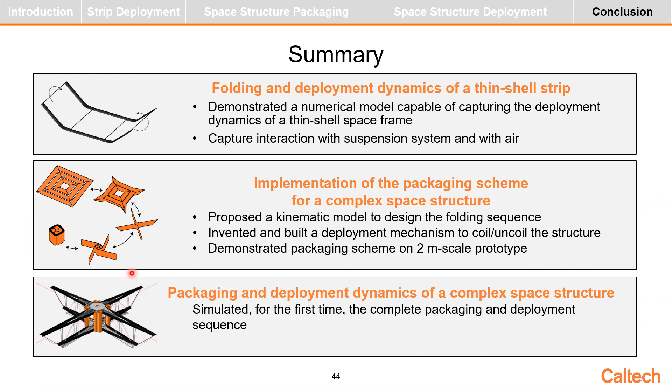And finally, we looked into the deployment dynamics of the space solar power satellite. And we found that our model can actually capture pretty well the experiments that we did here on the ground. So that's pretty promising. And in terms of contribution, as you can expect, this work directly flows into the development of our flight demo, Dolce.

Of course, we are folding the structure in the same way that I showed you before. And this folding procedure is actually scalable to larger structures. So as eventually we're going to move towards implementations of the 60-meter scale that we were aiming to, we can still use the same folding procedure.

And the deployment mechanism concept that I showed you before is going to be flown and demonstrated in space. And we are also trying to extend it to different types of problems. Here, for example, at the bottom, you can see a small coiling apparatus for a single strip that is used for a future deployable antenna.

And of course, what I showed you is just the tip of the iceberg. There is much more work to be done. And in particular, there are 2 areas that I think would be interesting to explore. One is the symmetry aspect of the problem. We are dealing with symmetric structures, and throughout my simulations, I showed you symmetric models. And for the most part, that was true. However, perfect symmetry doesn't exist in real systems. And so quantifying these effects of deviation from symmetry would help us understand better a real system in space.

And also the computational time of the simulation is certainly a bottleneck as you try to scale these simulations to larger structures and more complex problems. And of course, there are different approaches that other people are using, for example, adaptive meshing and model reduction techniques. And they offer a promising solution to combining both computational efficiency with good solution accuracy.